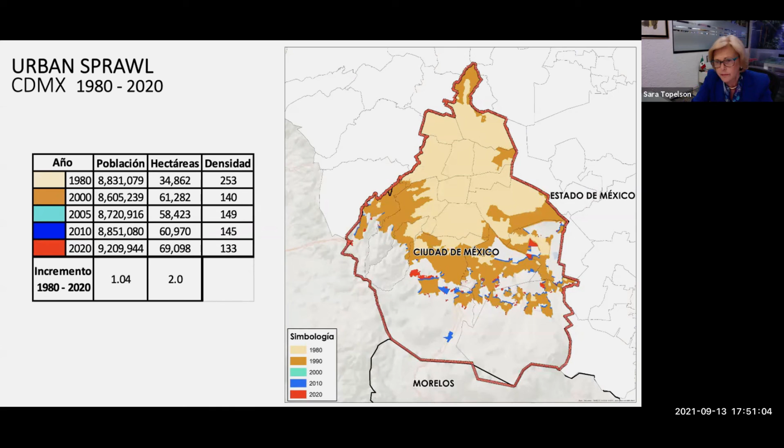And the population only grew 1.5 times, so there is an unrelated growth. Of course, Mexico City itself grows much smaller than the sprawl in the state of Mexico. So here you see Mexico City grew 2 times in its territory in 40 years, but population only grew 1.04 times, very, very little in these 40 years.

And if we see the state of Mexico, it's the opposite, because the territorial area grew 7.8 times, while the population grew 2.3 times, creating really a big sprawl. The biggest problem of the state of Mexico is that the growth is not friendly — it's leapfrog growth. So this dispersion is a real challenge to the city, but at the same time, a great opportunity.

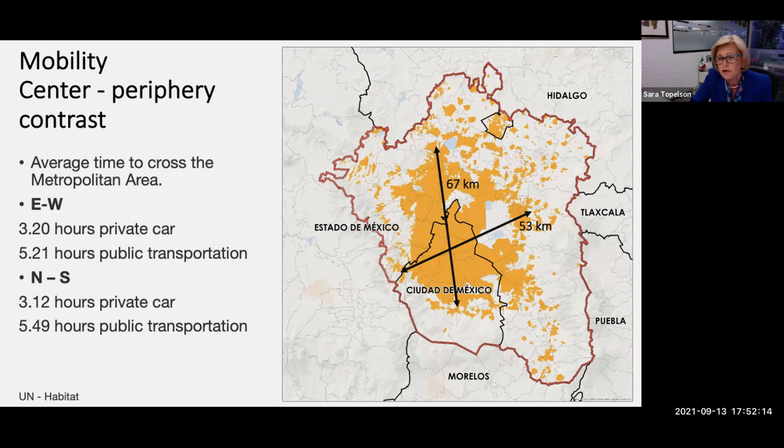Some of the challenges of mobility: to go across the city from east to west takes 3.20 hours by private car, but by public transportation more than 5 hours. North-south is 3 and some hours, and almost 6 hours to cross the city from north to south. So this is a big challenge.

We have different types of trips a day. In principal origin to destiny, we have 16.6 million trips a day. Some are done in public transportation, some by bike, some by foot — a lot of trips are made by foot. Some begin and end in the same municipality or district, some go across. If we look at how we move, generally 65% of mobility is in public transportation, 26% in private cars or other means, and then we have walking and some other types of transportation.

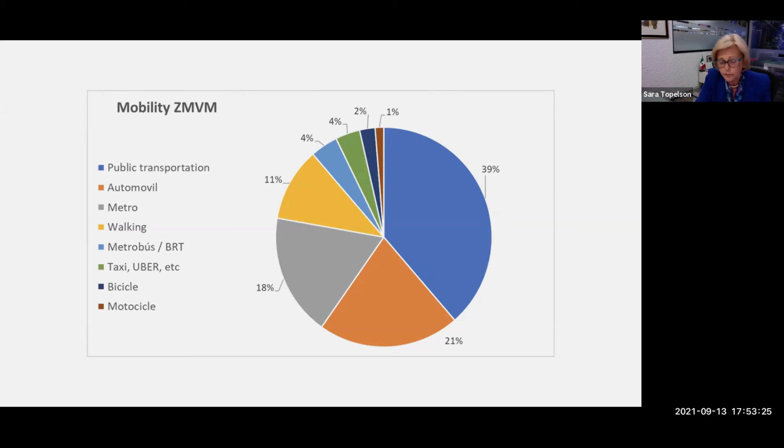I won't go into detail, you have it there, but you can see that in Mexico we spend most resources building roads for private cars, while people really move more in public transportation.

If we see what has happened with water in Mexico City, in the 16th century Mexico City was in the water, and we started covering the water areas, the lakes, creating lots of problems for our city. Today we have a big problem because we dried all the lakes in the city and we have to pump and bring the water from far away in a system called Lerma Cutzamala. We bring the water up to the city, and the use of water is not the most sophisticated, because we lose a lot of water in the pipes that transport it.

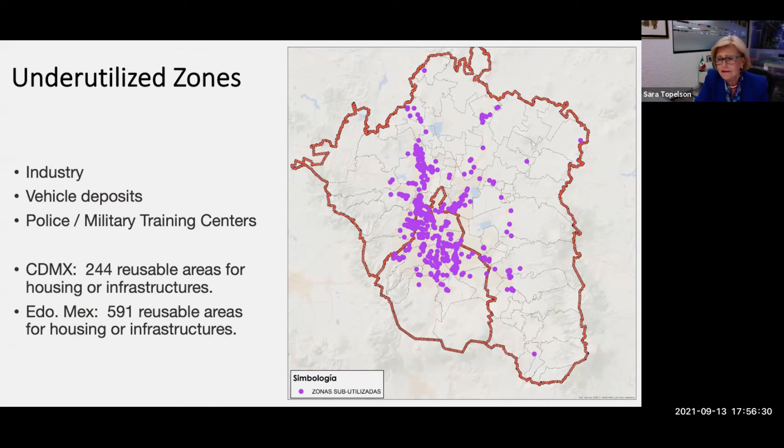That creates a lot of reusable areas in the city, which are great opportunities for development. Here you see some of these areas that shouldn't be working now, like vehicle deposits and junk yards in the city. They should be far from the city, or some industry that has lost its value being in very well located parts of the city.

Our downtown is a protected area, declared a World Heritage Site, and I believe Gabriela, Gabi, will speak about it. It has many opportunities for redevelopment, reconstruction, and refurbishing of many of the buildings in the downtown area.

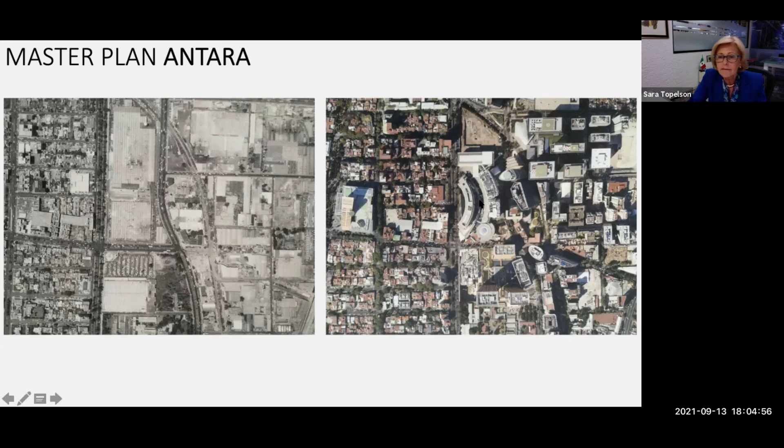And the results are amazing because this is what happened in the area. With this first open area shopping center with office buildings, the whole area changed. So now we have museums and housing buildings and a real project of redensification, increased a lot the real estate value. Here, the shopping center was also very creative because it's a shopping center with no anchor store and with a big open space in the middle.

Another reconversion that I think is wonderful, this was a refinería - I don't know the word in English, I forgot to look it up - the oil refinery, that was closed years ago.

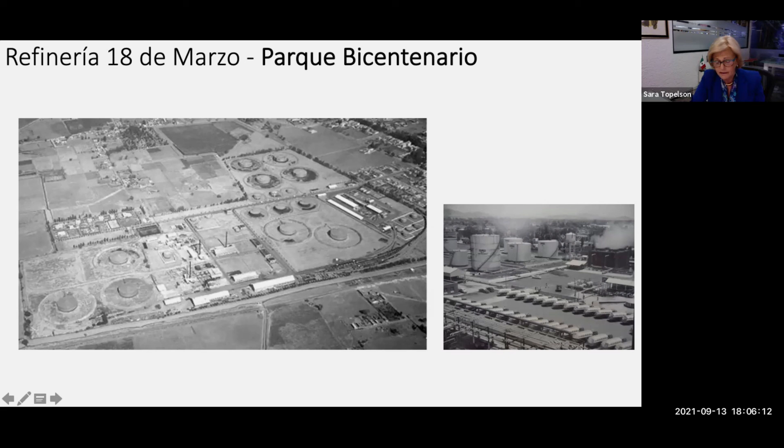I think in 1991 it was closed because it generated a lot of pollution in our city that we don't need, and it stayed there till 2007 when the government decided to turn it to a big park. So now the whole area is this park called to celebrate the bicentennial of our independence.

And it's, I think, a wonderful park. It has a great project by 3 very good Mexican architects. It has an orchid garden, it has some greenhouses, and it has green areas all over. It has walking paths and biking paths, and it's used intensively by the people in all these areas that had no parks. So this is an excellent reconversion.

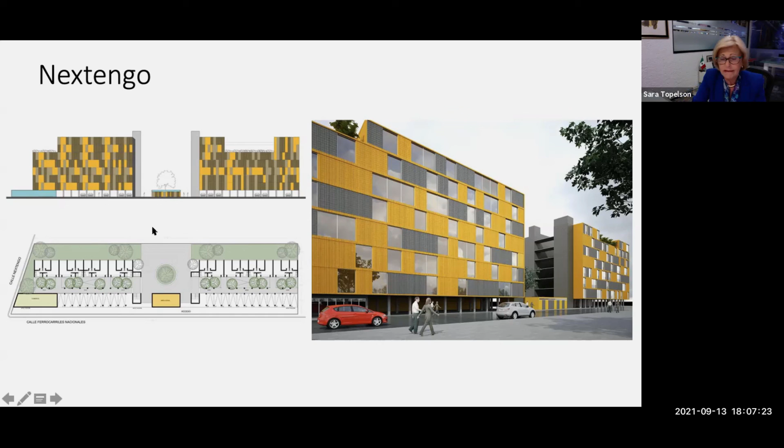And then I'll talk about a few of our projects in our office. This, again, was an empty lot in the area of the Nextengo. We created this project that has 128 units. They vary between 55 and 60 square meters. It hasn't been built yet, but well, it shows some of the opportunities our city shows.

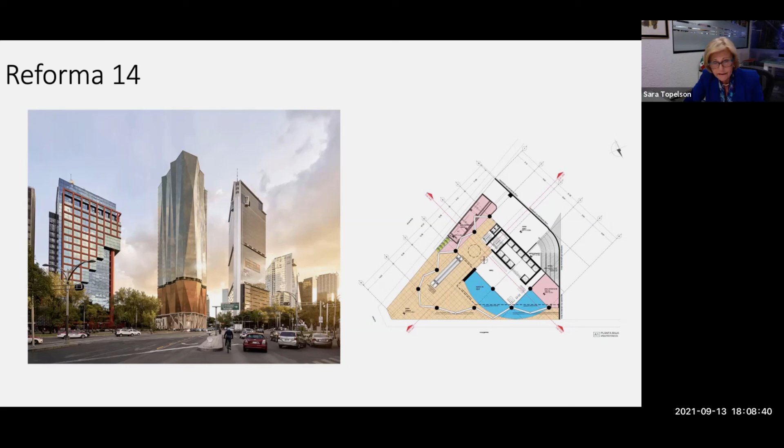Then we have the body of the building. We don't know if the building will be built because right now it's in standstill because of the problem we're facing in Mexico of a slow investment scheme. This building is 40 levels tall and has 4 underground parking levels. So we hope that things will get better and we'll be able to build it.

These 2 have been built. This is a project of a housing complex in the center of Mexico City, downtown, in the street of Humboldt. It's also an underutilized lot that is very well located. It holds 42 apartments of 63 square meters and 55.

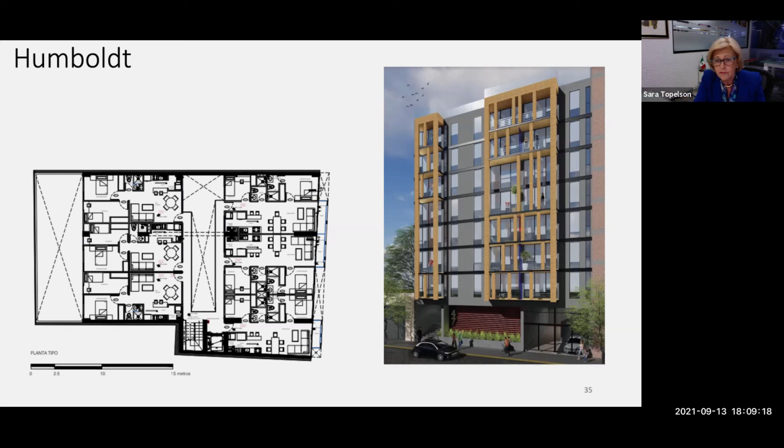It's 2 blocks away from the main park in our downtown area, from the Alameda. And that's how it looks. It's already finished, it's already inhabited. Of course the developers changed some things in the project, mainly the colors, but the building is a big success.

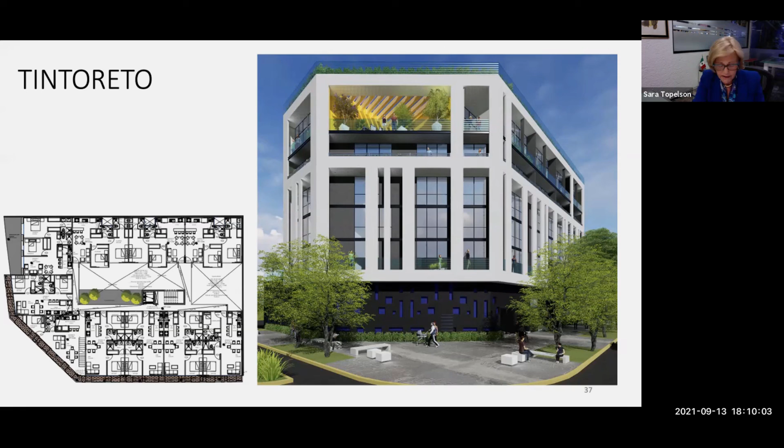It creates opportunity of housing in the downtown area. Another project now under construction is on Tintoreto, a very well located area, also an empty lot that had no use. It will hold 51 apartments in 6 levels, and it's also been very successful in the area. We hope to see it finished in the next 3 or 4 months.

Well, this is in very short time and very condensed information about what our city offers and the opportunities we see. Here's a look at the view of our city. And I put this poem of Octavio Paz.

Because I think he depicts in a very beautiful way the challenges we have in the city, especially the last part where he says, I speak of the city that dreams us all and that all of us build. I don't know why I can't read it, because I couldn't change the screen and I don't have it here, but I beg you to read it. I love this part where he says that the city goes to sleep for 100 years, wakes up and doesn't recognize itself. Of course not, cities are in constant transformation.

And this is just to see the scope, our city that almost is an endless city. Thank you.

I think now we will listen to Gabriela Lee.

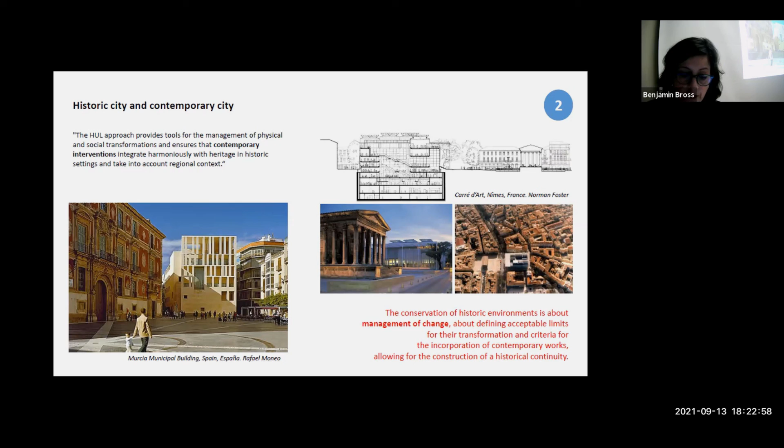So what I would say, we have paradigm shift number one, which is that heritage studies have become interdisciplinary, and they focus on the present interpretation or appropriation of the past, not only in the material conservation of the past. You have heritage studies in many different areas, that look at the materiality and location of buildings or monuments, but also processes of building memory, building identity, and building narratives.

Paradigm shift number two is to look at heritage as a system within the complexity of cities, which are also living organisms. The HUL concept, the historic urban landscape, must be based on social perception. It is a social construction and not a top-down approach, where maybe some authority or a group of experts will tell us what needs to be preserved.

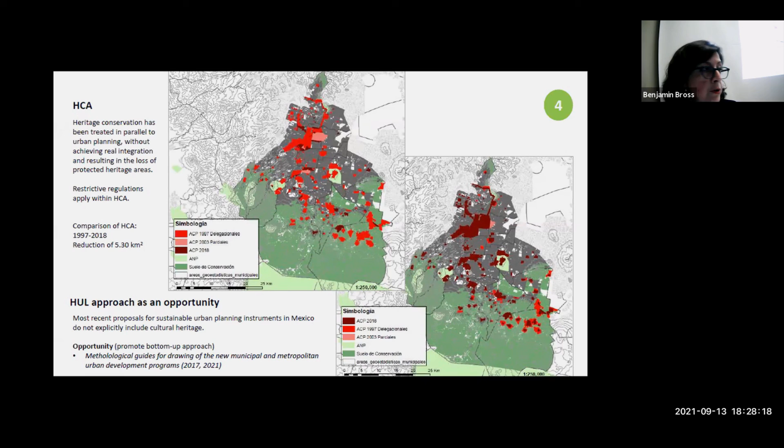I see the HUL approach, the historic urban landscape approach, as an opportunity because most recent proposals for sustainable urban planning instruments in Mexico do not explicitly include cultural heritage. An opportunity where I see a chance to develop an approach that's bottom up, that includes citizen participation, is in the latest methodological guides for drawing new municipal and metropolitan urban development programs, which haven't been enforced yet.

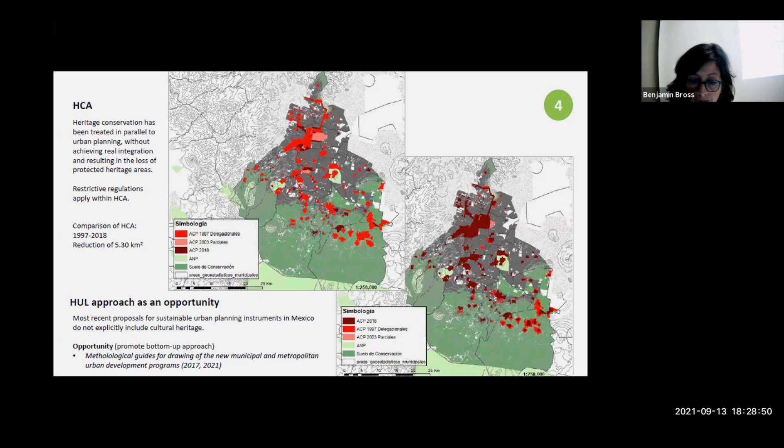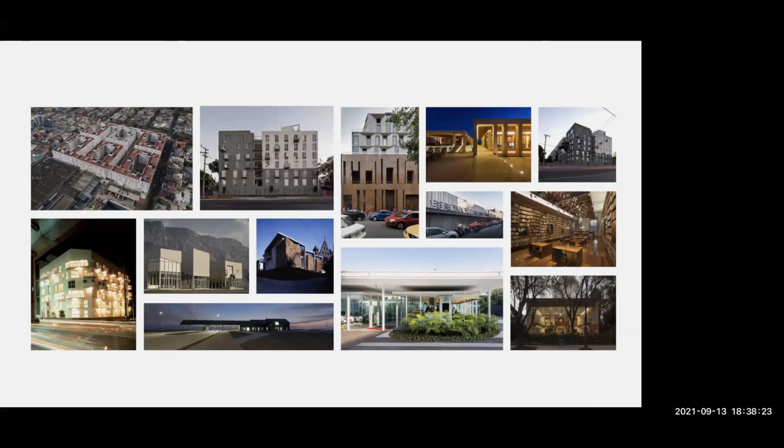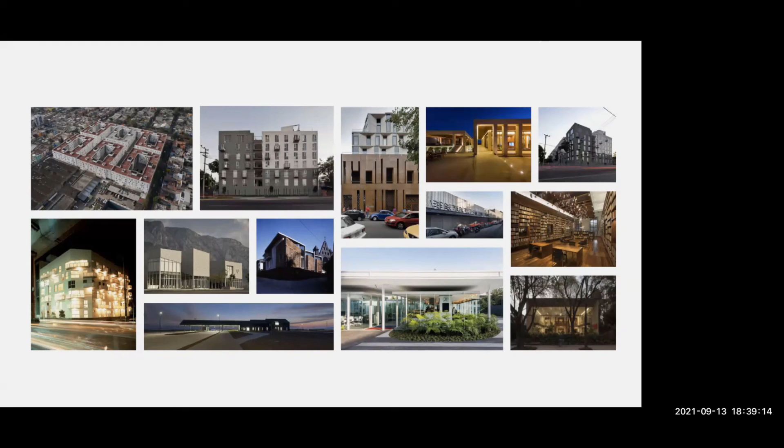In some cases it involves work along cultural heritage, in some other cases work along mobility and housing, which are the two topics I'm going to be talking about. But in many cases, it talks about not only the opportunities and the challenges of Mexico City—but I was thinking, just looking at the last 10 days of events in Mexico City, it is more about clear and present dangers, to do the Tom Clancy novel.

So last Tuesday, we had a 7.1 earthquake after a big storm, which produced one of the most apocalyptic landscapes in Mexico. Not only did you have people walking out in their pajamas, but suddenly the whole sky lighted blue through reasons no one can clearly explain in a scientific way. But it is a kind of reminder that we are living in a valley at 2,240 meters above sea level, which is very prone to earthquakes.

The next day, we had one of the most terrible floodings of the season. This is the neighborhood of Ecatepec, a community of 3.1 million inhabitants in the northern part of the Mexico City metropolitan area, where the flooding reminded us, as Sara was saying, that we live in a lake.

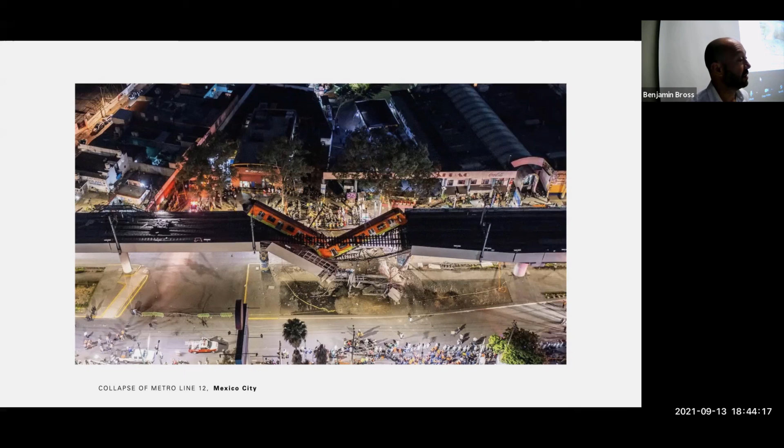This raises a more relevant question in my mind: what's the role of architecture, planning, and landscape design in addressing these deeper challenges and failings? Are we just spectators, or active participants in imagining a new, different, and improved kind of city?

I'm going to talk about housing and mobility, not because they're the only challenges, but because they're the ones we feel we've been engaged with more recently.

This is a city simultaneously producing elevated highways all over, assuming, as Sara said earlier, that even though 7 out of 10 trips in the city are made by public transportation, we're producing infrastructure for the private car. This has been the modus operandi for the last two decades.

The irony is that it's progressive, left-leaning governments that have been building these elevated highways. Simultaneously, and paradoxically, more recently it's also these governments producing alternative modes of transportation, like the cablebus or cable cars, similar to Medellín and many other cities, implementing innovative public transportation models.

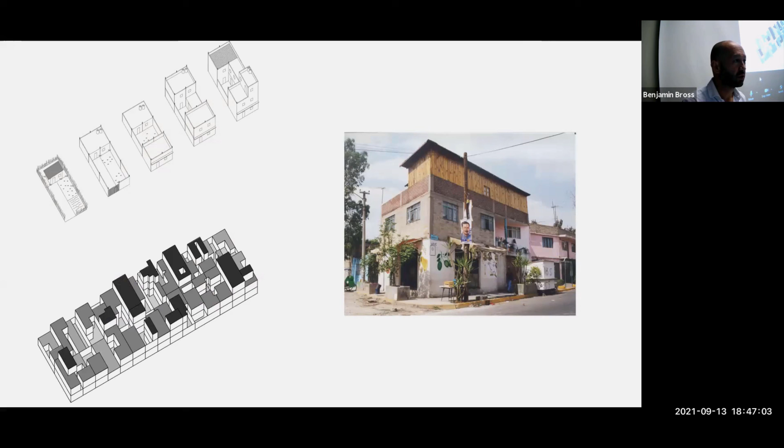We move to the peripheries that Sara showed, the area called Ciudad Neza. Back in the 1990s, when I coincided with Benjamin and Paco at the GSD, I decided to do my doctorate on Ciudad Neza, an informal neighborhood and informal urbanization in the peripheries. The problem was how do we urbanize a lake, where half the city has been produced outside traditional planning and regulatory frameworks, and where our notions of housing have been built outside what we'd traditionally imagine as regulated housing. What does that say about our forms and procedures?

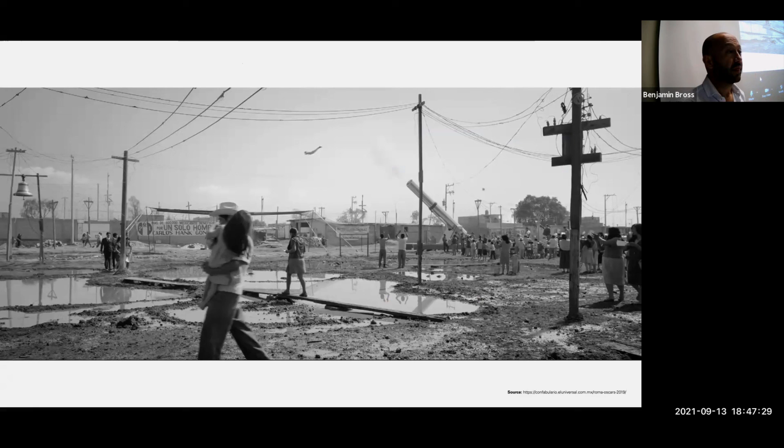This is the same neighborhood fantastically represented by Alfonso Cuarón in his film Roma. It's the peripheries where the maids live, where she's looking for the boyfriend, an area where the marginal, in all its social and urban extents, is happening.

I always say that when you research a topic enough, at some point someone's going to ask not only for your opinion but for you to actually work on the issue. This has been the case for questions of mobility.

In 2014, our office was fortunate enough to win the Audi Urban Future Award. It had to do with understanding the role and possibilities of architecture and urban planning to question and improve issues of mobility.

Similar to Sara's diagrams, we developed a series of cartographies trying to imagine not only the infrastructural and physical aspects of mobility, but what they meant at the social level—which inequities are being produced by these mobility infrastructures, who's winning and who's losing, who has to make sacrifices in terms of location, comfort, safety, and time spent on public transportation.

And this is the neighborhood of Neza nowadays. This photograph, which was used in the book The Endless City by Ricky Burdett, and a photograph by Armin Linke, represents this materialization of the growth that Sara explained earlier. And it was one of the neighborhoods I researched during my doctoral dissertation.

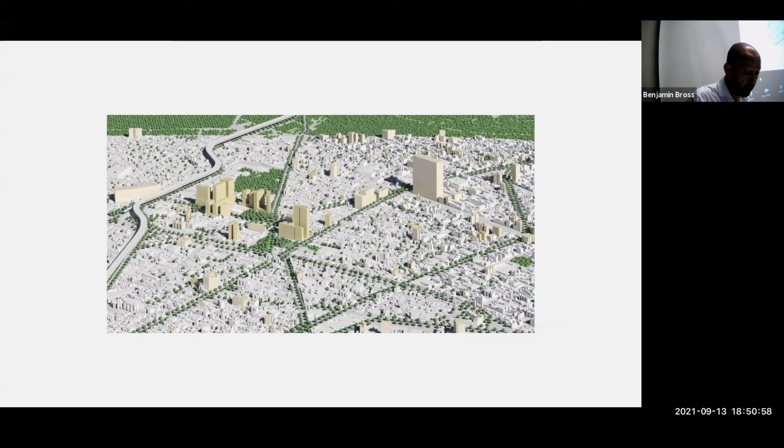We have been fortunate enough, as Benji was saying earlier in the introduction, to work on 2 more additional transportation hubs. One for Tacubaya, which is the equivalent of a business improvement zone, where a partnership between 16 developers and the city have begun to transform an old area of the city, an area that has cultural heritage, into a hub of investment, because it is very well located, very well connected through a multiplicity of subway lines, the BRT lines, as well as close to a lot of jobs.

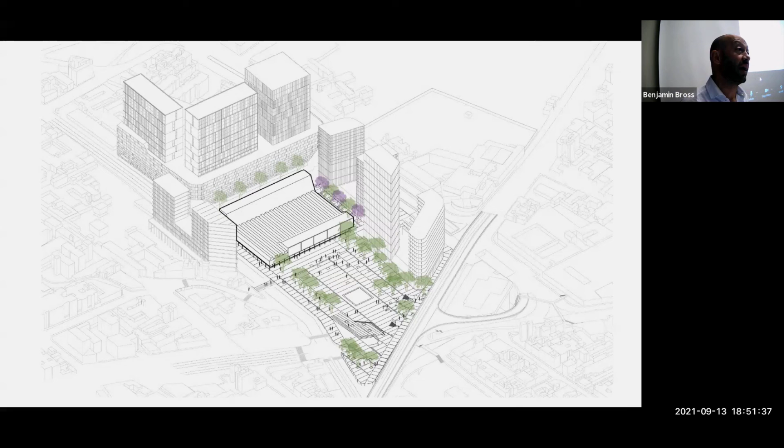So we have been fortunate to be working with 3 clients here. One of them is a corporation called Tavistock. The other one is Mobility ADO, one of the leading mobility companies in Mexico, which operates buses, and a third small developer. And now we're building over 1,500 units of affordable housing here, as well as a transportation hub.

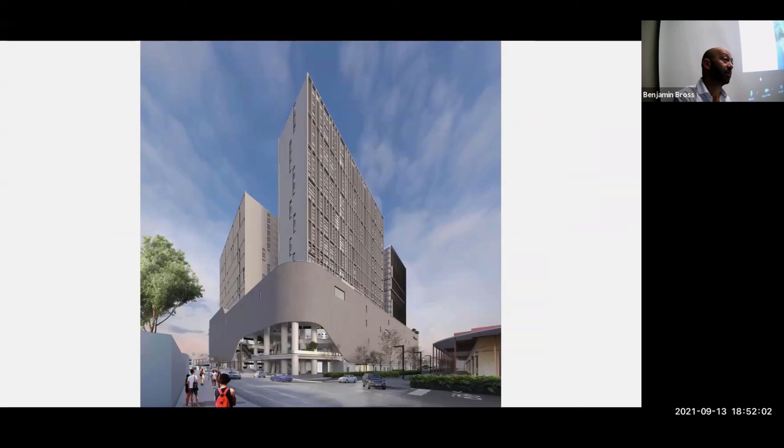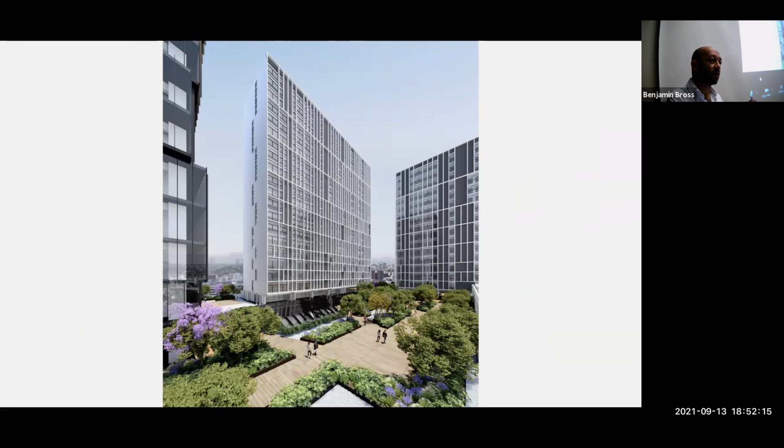But this is a place where an understanding of a problem, an understanding that it is this crisis of mobility and this crisis of accessibility that becomes the obstacle for further development. But to actually intervene and begin acting in some of these places, whether it is these massive multimodal hubs with over the equivalent of 1 million square feet of development, including the bus station, a shopping arcade, and housing and a rooftop, requires recognizing that architecture and the design professions are full of contradictions.

This act will probably entail forms of gentrification, and the awareness of those contradictions requires the tools to deploy methods of control. We need to understand that every single act of architecture and design is already problematic in itself, in the way we relate to nature and the city.

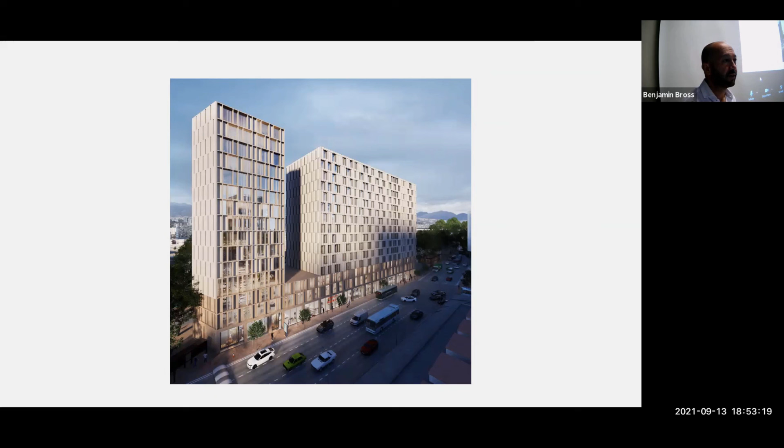And in this recognition, there comes a possibility of finding epiphanies, of convincing some of the clients. For example, this is for the private client, in which we managed to say that to be part of this program that guarantees affordable housing, by producing 30% of every unit here as affordable housing, you would have a streamlining of the processes. So to convince the clients to engage in this type of policy goes beyond the traditional goodwill of addressing the big problems and challenges of our time.

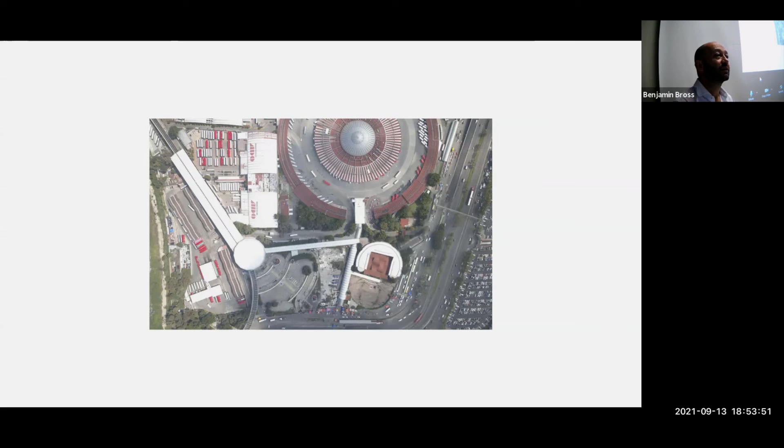And these are some of the projects we're doing in Tacubaya. The second intermodal hub is one in the eastern part of the city called San Lázaro, or Tapo, which are these again no man's land territories of huge infrastructures. We have a regional bus station, 3 subway lines, as well as bus companies. So sometimes the act of architecture is only facilitating the minimum infrastructure for people to move from one system to the other without getting rain falling on you.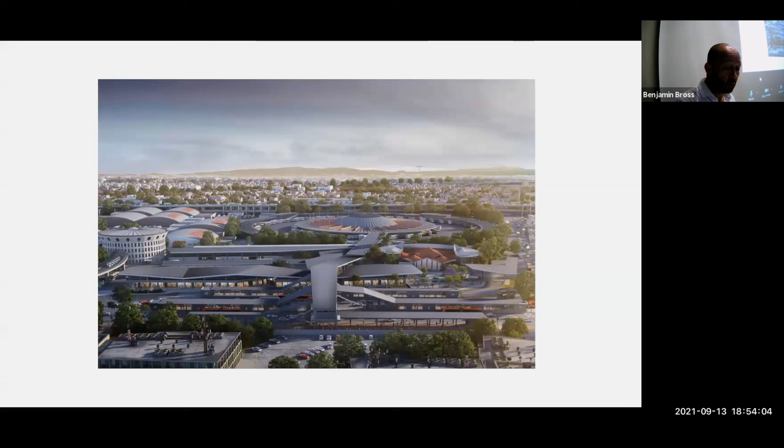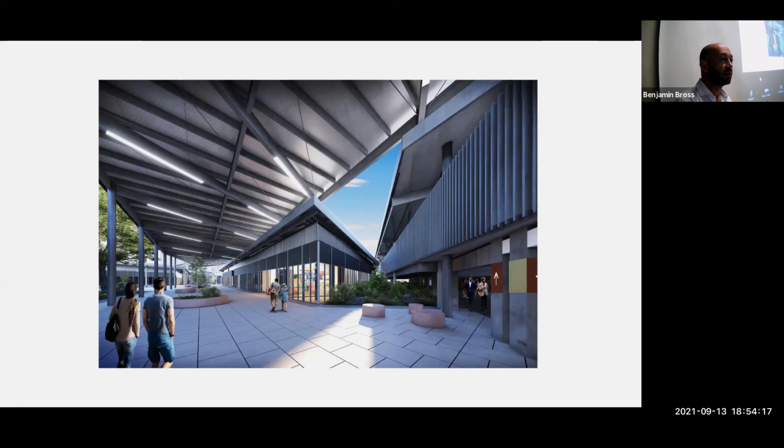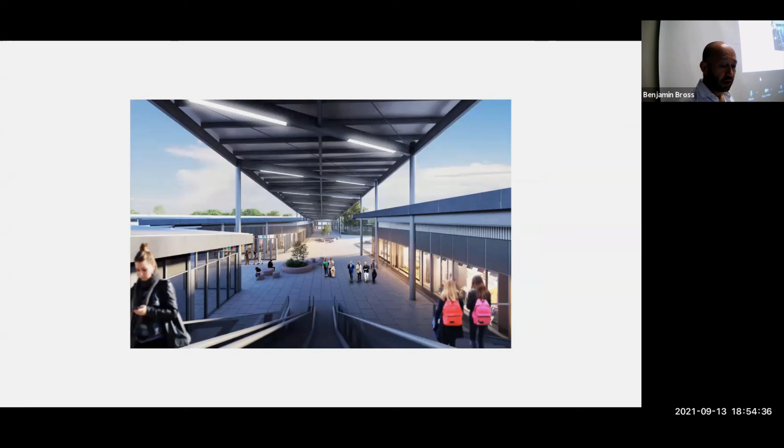It's sometimes almost like working in the interstices of these huge infrastructures that came before us, in which the 5,000 square meters of retail that happen next to the station are almost like minimum interventions that facilitate huge flows of people. So to address the question of mobility is maybe to take a step back from the hyper powerful, alpha macho attitudes of architecture, and to understand that sometimes universal access and a good roof do the job.

The other big aspect I wanted to show, already touched upon in the Tacubaya projects, is the question of housing. This image, which is not Photoshop, shows one of the peripheries not very far away from the ones Sara shows, the kind of housing that up until 2006 was produced in most Mexican cities. Half the production was formal developer-driven affordable housing, which is on the right—single family in most cases, very limited services and infrastructure—and the other half remained informal urbanization, basically self-built, unregulated and unplanned houses.

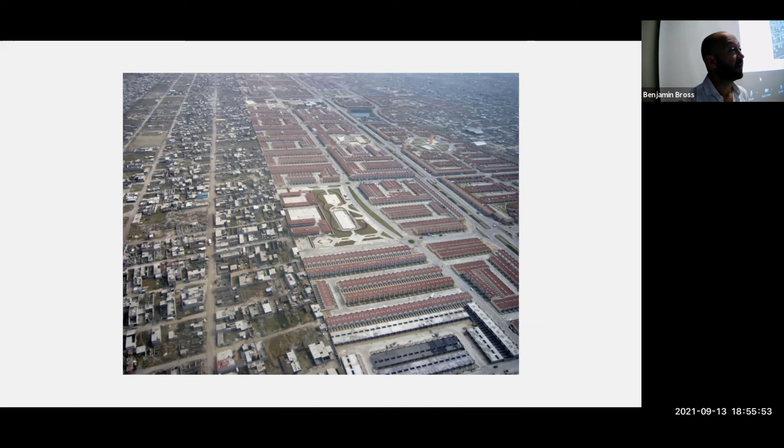Sara, through her work at SEDATU, the Territorial Ministry of Urban Development, understood that to address the negative externalities of informal housing, we needed to develop different policies and also change the developer-driven model. It's always a hassle—it's always about carrots and sticks.

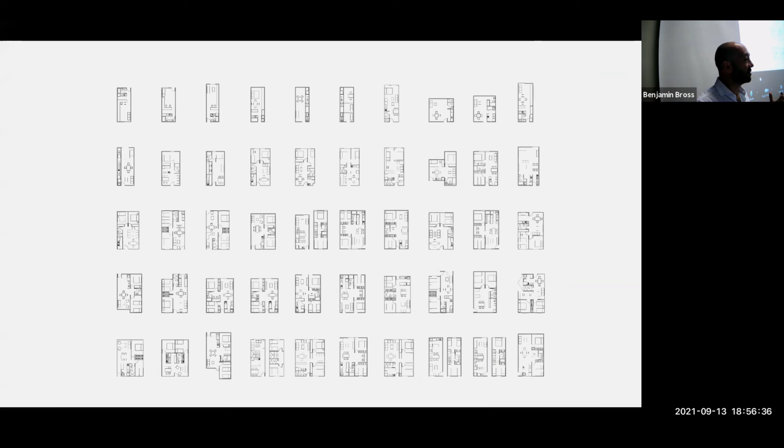It has to do with disciplinary questions of typology and morphology, questions of how we produce density and shape buildings, how we maximize the use of urban space, but also how we resolve typologies that address new demographics, such as smaller families, unwed couples, and lesbian, gay, queer housing, which has not been traditionally addressed in government policies.

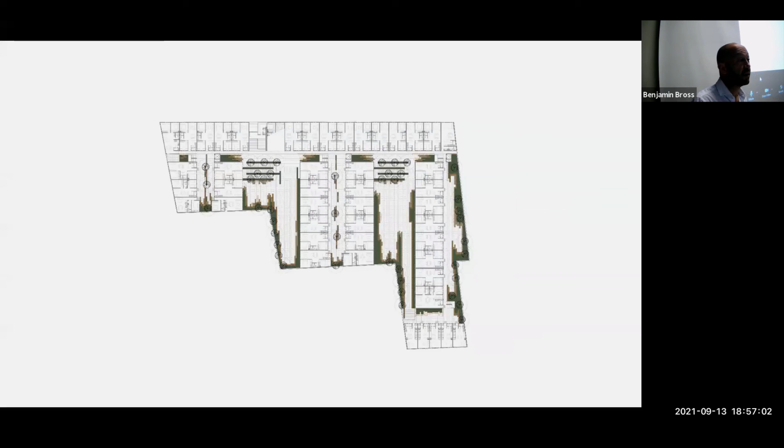We've been fortunate to work in affordable housing in a number of projects, having finished over 2,000 units in the city, all located within a quarter mile of public transportation, all with at least 8 different typological variations and diversity in housing. All of them understanding that producing housing is not only about the unit itself, but how you facilitate urban life and jobs.

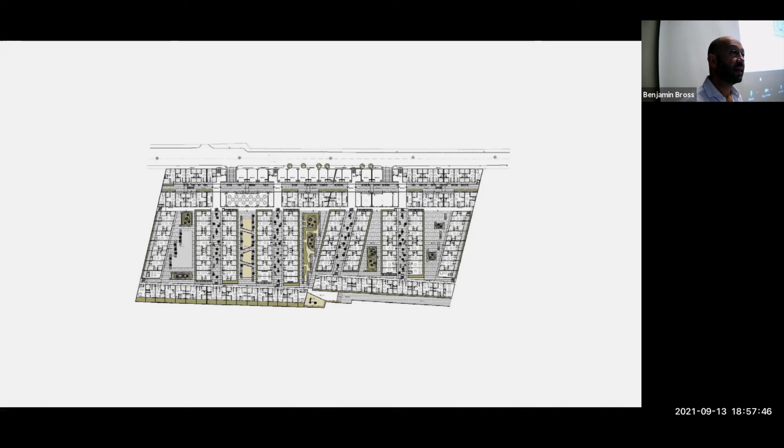The first project was in Colonia Doctores, and this second one is in Iztapalapa. It's a simple approach going back to courtyard housing—understanding the fixed and the flexible, guaranteeing you can still look at your children play in a courtyard from the window. It's about understanding that people who used to self-build their homes need architecture that provides an extra that informal housing does not create.

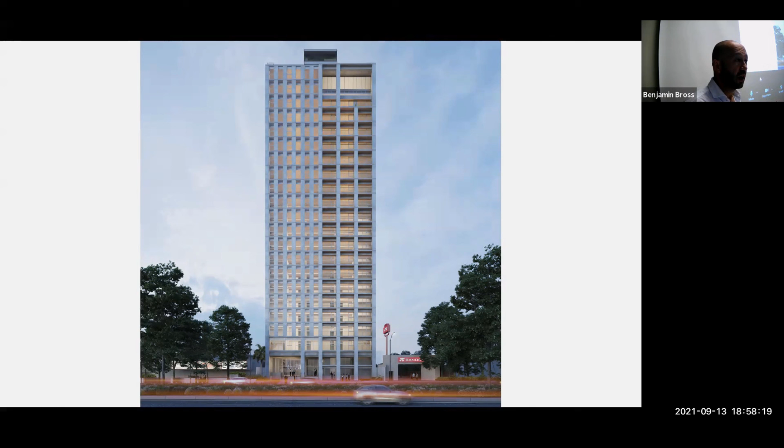More recently we've been collaborating with our good friends from Productora, one of the most innovative practices in Mexico City, on multifamily housing, which is a different animal—rental housing. It's about understanding that house and housing should not necessarily be about ownership, and that we need alternative models of guaranteed dwelling, some of which will come through rental housing.

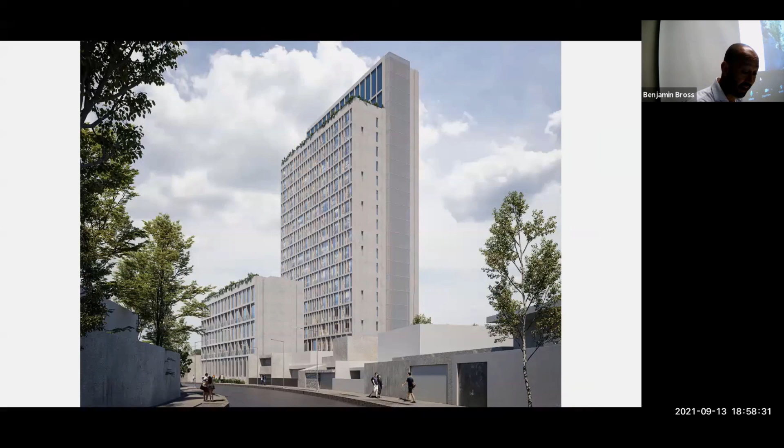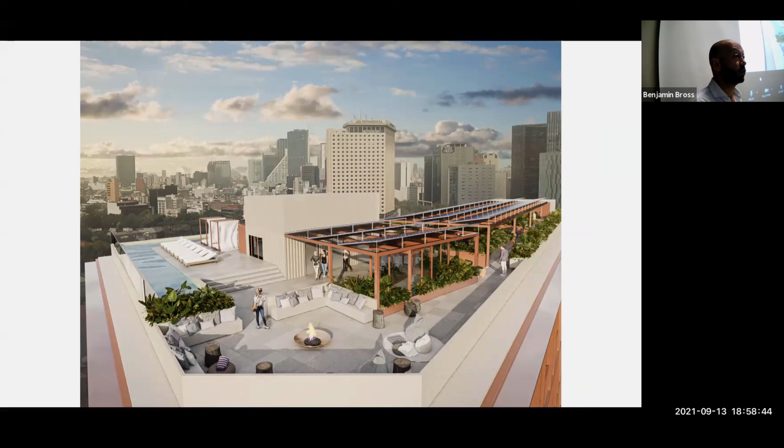Two of these projects are in Guadalajara, and this last one is in Mexico City, in the street of Bucareli, at the limits of the historic center. What does it mean to produce 80% of units as studios? It means a whole new demographic is willing to give up on distances, on the idea of a small house with a tiny garden on the peripheries, and prefers not to commit to a 20-year mortgage, but to rent and have the freedom to move around as they move through different cycles of life.

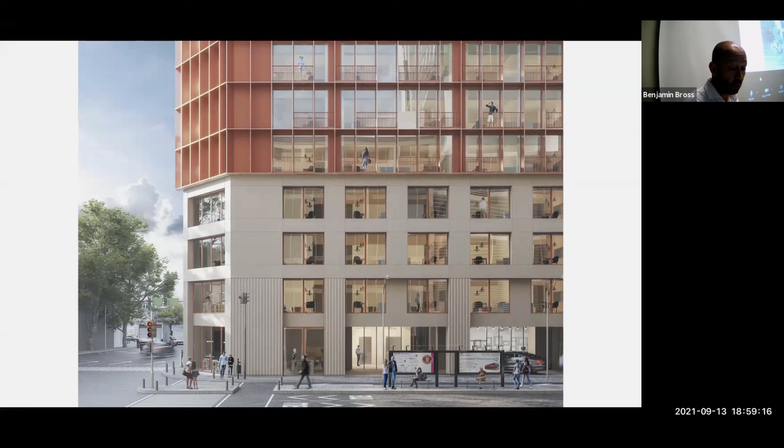80% of the units in these buildings are studios, and the other 20% are 1 and 2 bedrooms, which speaks to the shift, and also to a different kind of amenities and communal life. These 3 buildings are already under construction. This one is in Bucareli, just one block from Reforma Avenue.

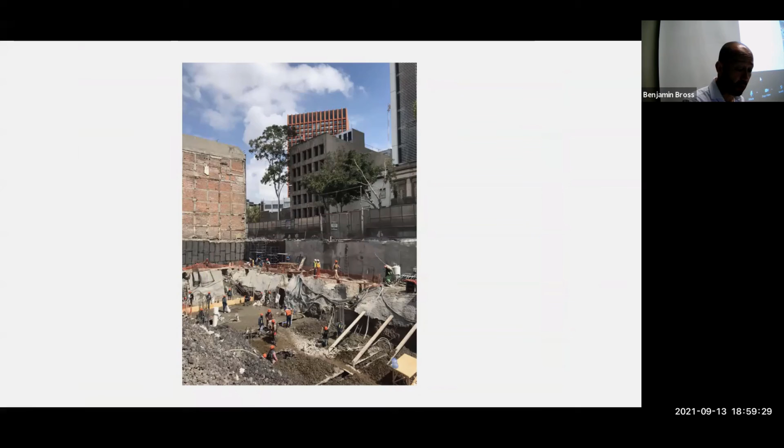When we talk about mobility and housing, we don't talk only about housing alone or transportation infrastructure—we talk about the whole spectrum of infrastructure for social living. One of the most interesting policies of the new Mexico City government is the initiative called Pilares, hubs of innovation, liberty, knowledge, and recreation—small infrastructures of 500 to 600 square meters placed all over the city, especially in very poor neighborhoods, equivalent to the SESCs in São Paulo, like the one by Lina Bo Bardi, but smaller—somewhere between a public library, a cyber school, a childcare facility, and small arts and crafts facilities.

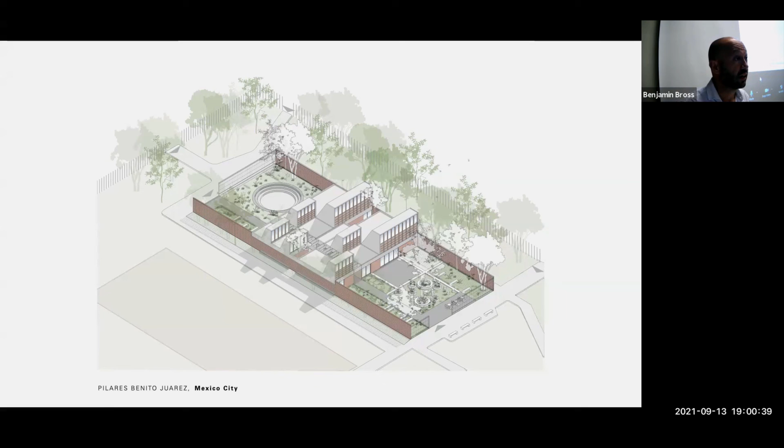We've been invited to develop two of them: one in Benito Juárez in Mixcoac, right in the middle of a park, an old area that was used by drug dealers as a kind of hub in this particular park, which is being transformed into one of these small facilities with classrooms, meeting facilities, and open spaces.

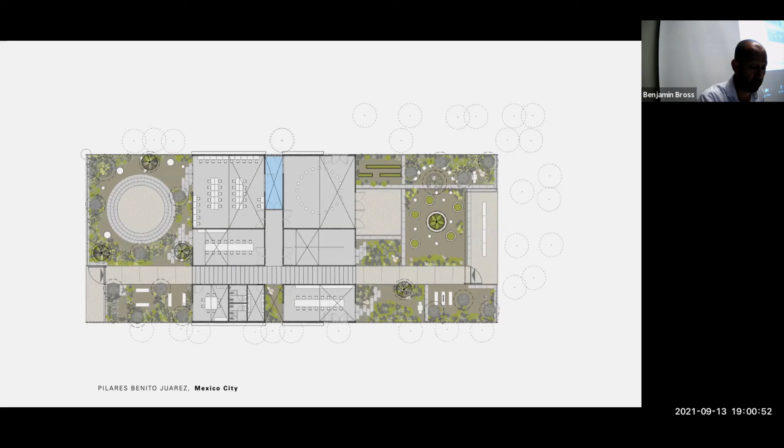And actually this is under construction, and we should be finishing this in 2 to 3 months. All cast poured in place concrete with these big skylights.

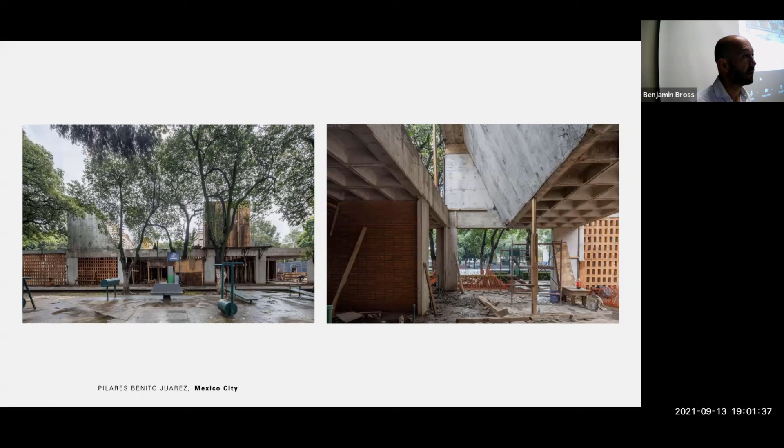For us, this idea had to do with, even in the context of very tight public work projects, how do we produce a sense of civicness? Even if this is a very flat single-story building, these skylights are not that different from the ambitions in the Moneo work in Murcia, which is how do you achieve through small moves a sense of civic pride, fundamental in works such as this one.

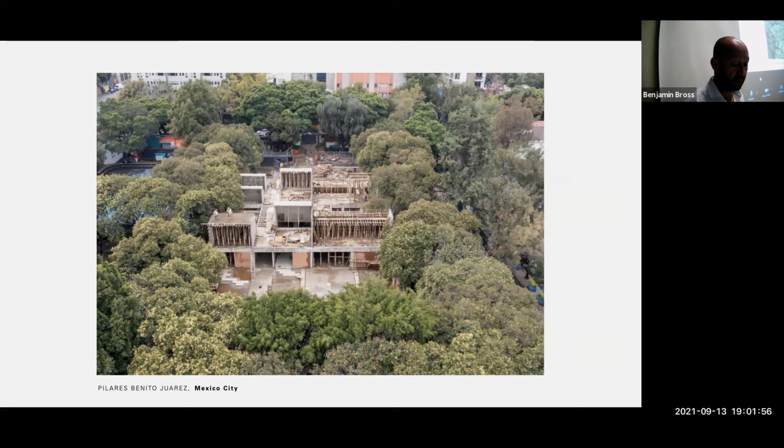So these pictures are from last week. This is a new pavilion in the park, which had to do with this other idea of the least possible, least intrusive work in this area that had already been impacted.

And the second one is in Iztapalapa, one of the poorest and largest boroughs in Mexico City proper. This used to be a former safe house used by drug dealers and kidnappers to keep people they had kidnapped. So the act of reclaiming the site and doing a lot of groundwork with the community goes back to Gabi's comment that to transform the landscape requires social participation at multiple levels.

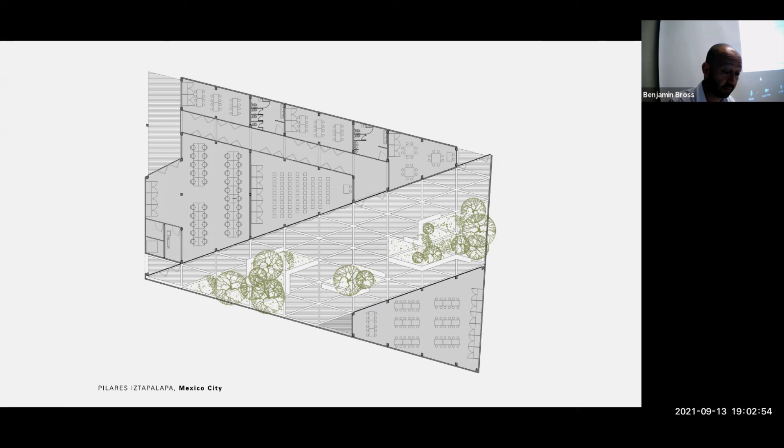In this particular building we produced what we call this almost I. M. Pei National Gallery scheme of triangles, a street that goes through the center into a kind of courtyard, and this steel structure, which again appeals to the sense of civic pride, creating a reference.

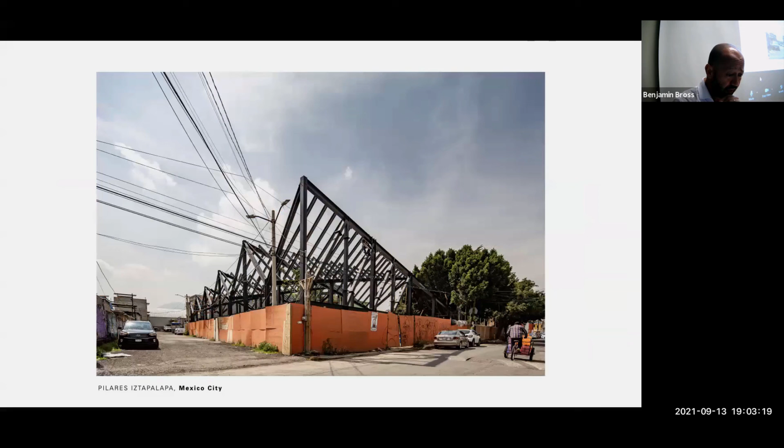These pictures are from a month ago, but as you understand, how do you create small hubs of transformation where architecture can begin to reclaim back the possibility of symbolic and significant change? And this, again, in 2-3 months, we should be opening up.

I'd like to end with 3 images, which in my mind put forward what I feel are the contradictions of our practice and the challenges here. I think there are three aspects that are beyond the realm of design, and beyond the realm of architecture.

These are the same challenges that, as Benji was reading the first statement about the original populations of these lands, this is one of the big tasks we have, not only as Mexico as a country, but I think the world in general, to recognize who's been left out of these conversations. How do we put forward policies which make sense of these conversations?